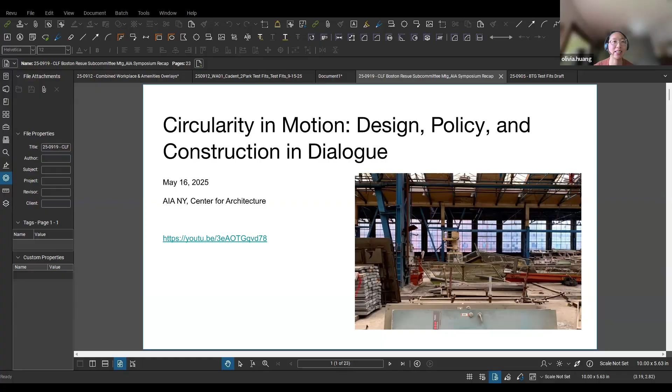And she also, I think, yeah. I think we're just seeing your cover slide still, Wei. Maybe we're not seeing the slides that you're panning through. Oops. Sorry, one second. Computer froze. Okay, here we go. Let me just share my full screen. Okay, one second. Okay, how about now? Yeah. Yay. Okay, great.

So this slide has a couple key components, like, how do we see a building not as an object, but as a process? And one of the things we were all very curious about is what Denmark is doing right that we're not able to follow as rigorously. It's not just the cultural and policy context, but it's really through their legislation.

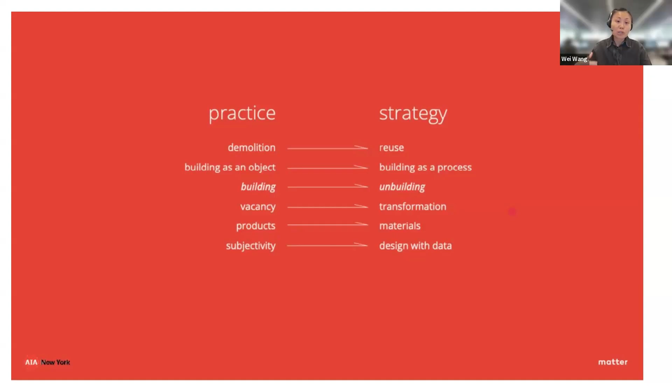It's really about circularity not being viewed as niche or experimental, but how you have a policy-supported pathway that can integrate industry, research and governance. So there's a very strong relationship between policy and the private sector, and the whole political landscape is more homogeneous, and they also build infrastructure along the way to go with the policy.

So another key component, then I'll hand it to Greg: in order to understand how to design within circularity, you really need to understand the context and constraints of the existing structure, but also what inventory you have in the existing building, documenting the resources you have on hand, their value, quote unquote, how you define value, and to really help building owners take the first step of shifting their thinking. So, Greg, do you want to take it from here?

Yeah, could we actually go back to the previous page for one second? Sure.

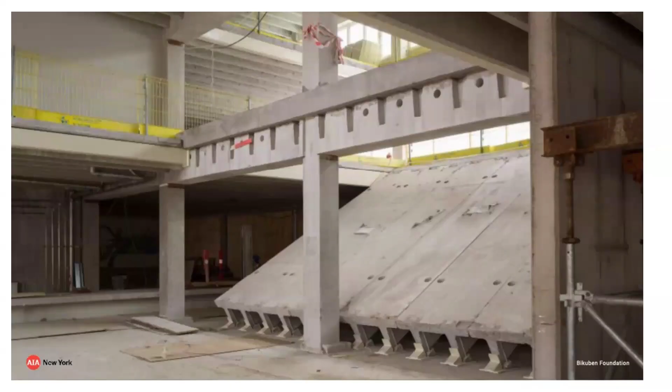So part of Lena's work focuses on, like Wei was saying, uncovering the value of what owners currently have. This is from a project she did in Malmo, Sweden. The project is called Varvstaden, and it's a kind of closed loop system. The owner has a series of buildings on a formerly industrial property that are being redeveloped.

This is a slide of the documentation that Lena put together, showing how the building serves as a toolbox, viewing the different components as items to reuse, reclaim, or recycle, and that we need to present this information back to the client or owner as our understanding of what the value is and how the different components can be repurposed.

This is a unique example because it is a large property with multiple buildings, so the client is redeveloping them in stages, and they're able to actually have materials taken out of one building and stored in another building until they're ready for future use.

The process she pursued with this campus really showed the importance of material audits and how to place value on materials. Also coming out of this conversation, and the conversation throughout the day of the symposium, was the idea of reframing the word waste and instead speaking about things as materials. That reinforces the concept Lena executed with this Varvstaden project.

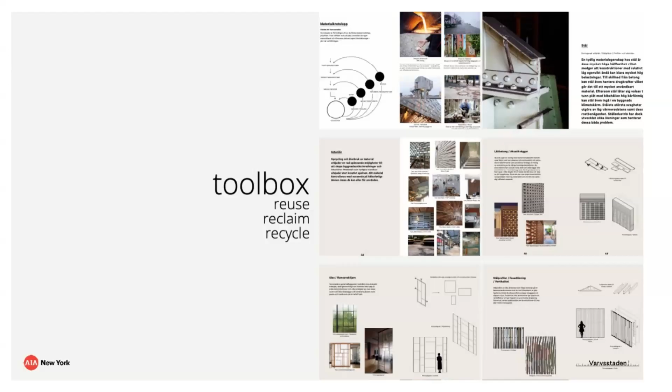And also, if we go to the next slide, another example she showed from another architect in Copenhagen, where they renovated a very banal office building into, I think it was kind of a multi-use building, but this image really compelled me, where you can see that they basically took the slab and cut it and folded it down. So bringing an architectural language to reuse here, and this became a bleacher for a kind of performance gathering

space within this building, creating double height spaces and using the materials that were already there, and also reducing the carbon input to reuse them by literally cutting it on site and just dropping it down. So this is a bit complicated in terms of the engineering that went into making this particular change actually work, because there's a lot of engineering that went into checking that these slabs could sit this way and the building could be supported. But it just goes to show that with a little creative thinking, we can kind of reconceptualize what reuse means.

So the latter part of her talk talked about Circu, which is a program that was in development when we first met Lena, and she's since developed a lot in terms of the actual infrastructure to operate it. And what it is is a database that pulls from open source information that's available in Denmark. So it's a bit different than our infrastructure here, but they have a lot of open source information on their building stock. And so it may not be 100% accurate, but this gives an owner a very good picture of what value might exist in their building.

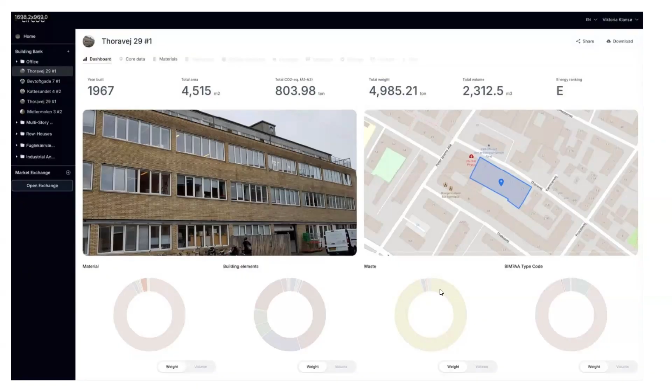Session 2 was really about advancing reuse beyond recycling, and we had 2 speakers, Deconstruction Dave, as he's affectionately known. He's the founder of New York City Circularity Construction Network, but before that, he's also the owner of a reuse general contracting practice in Seattle. And he's done over 5,000 reuse projects, mostly focused on residential work, but he really deconstructs the entire home and takes apart stud by stud everything, and then finds either a new use for them with a different client, or with the same client tries to reuse that material in a new project.

And Stephanie Phillips is the senior program manager at the deconstruction department of the city of San Antonio, which is actually an arm of their historic preservation department. And so we brought these 2 together because they have done a lot of work together and have actually done a lot of talks together, but they both have this knowledge about what it takes to actually implement a project, both from a constructability standpoint and from a financing, policy, and community support standpoint.

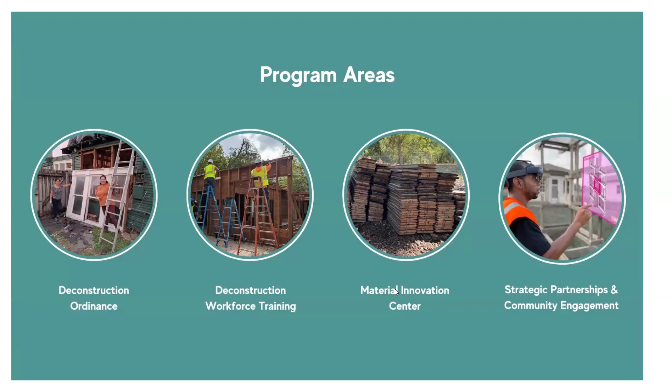And it ties into the work that Dave is doing because he has been working to create multiple reuse innovation centers, which are also kind of not just storage facilities, but kind of a laboratory. And on the next slide, he talked a bit about the reuse innovation center he's starting in New York City, which is kind of going hand in hand with the New York City Economic Development Corporation's design and deconstruction guidelines, which we'll touch on in a later session.

But this is really kind of what the prototype for the New York City facility is looking like, with a series of workshops and kind of dedicated space for storage, but also space to really sell and distribute the products, not just put them in a place where they can sit forever.

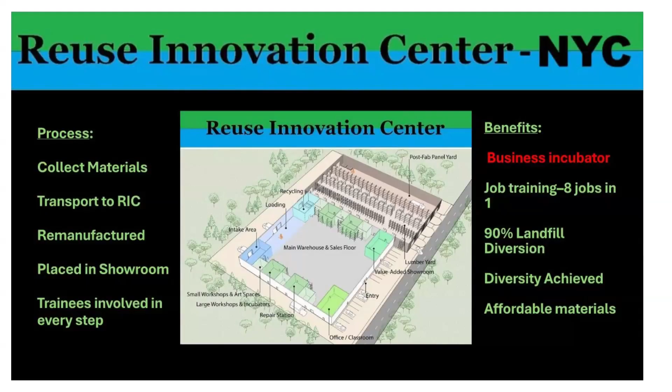Oh, Wei, you're muted.

Sorry. So the way that we sequence these sessions is that we kind of zoom out international, aspirational, and then we kind of go into other examples from other states and cities. And then we want to kind of bring it back to New York State. So a large piece of circularity is the policy aspects. So we were fortunate enough that we had members' connections with folks in the city and state.

So Selvi Binder, she's the senior policy advisor in the mayor's office, and Felix Heisel, I'm sure a lot of you know, he's the director of the circular construction lab at Cornell. And we also had Brian Kavanagh, who's the state senator in New York City, and Anna Kelles is the assembly member from upstate New York.

So this session really is to get some insight on the critical role of policy and how it can shape the future of circular construction, from state legislation to local implementation, and how that will all pan out. So there are no slides, just snapshots. So it was just a discussion, but a big thing that they opened with was New York State is projected to run out of landfill space within the next 15 to 20 years. So infrastructure wise, this is something very real and tangible that we need to tackle.

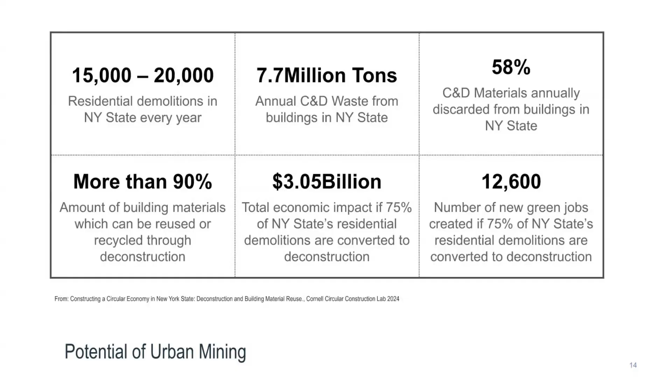The other thing about the materials, and it relates to this too, is that there's a time-based relationship with our materials. So when we talk about deconstruction as well, that starts to really tie all this together. One of the big issues for infrastructure in New York City is space. And so that means both storage space for materials that are being reused, but also storage space on the actual job site when we are trying to take materials out and deliver them somewhere else.

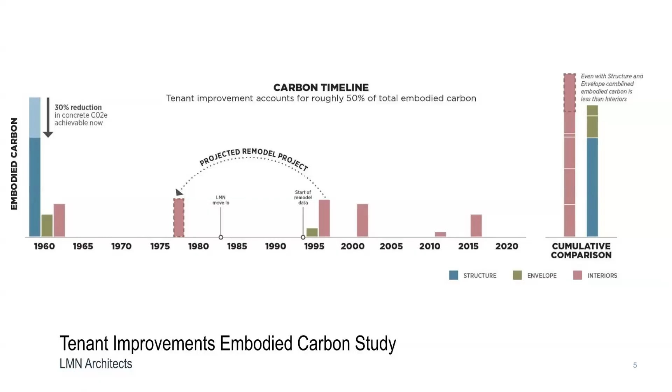Yeah, and just to go back to this, Greg and I also listen in on Sydney's glass reuse group. There are monthly calls, and she will talk to contractors and architects about actual project precedents, and things like, this building doesn't have a loading dock, or it's a certain size, and these little bins can't fit. It's all about logistics, and then how do we bake that into the design from day one, so that in the future, if you need to reuse, there are fewer logistic issues.

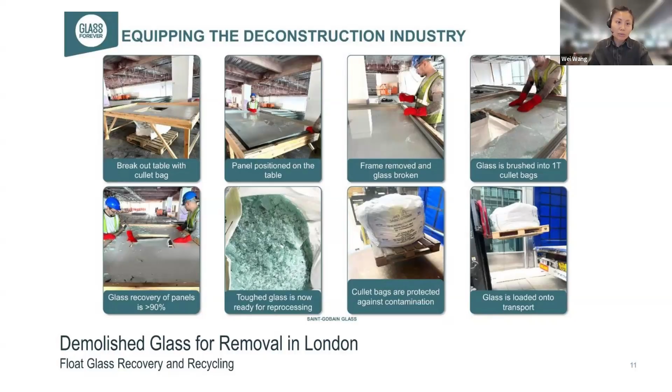And she also mentioned some of the contractors talking about the certificate of insurance: if it's reuse, it has a different implication for demolition. So all these things are seemingly not design, but they are part of design, because you have to fold the operations of the building in when you're designing it, so you allow these opportunities in the future when the building inevitably needs to be renovated or adapted.

So then in the last session, we went into a New York City project, specifically a New York City Economic Development Corporation pilot project for the circular design construction guidelines. The speakers are the team members and the VP from NYC EDC. Sarah Sachs is a partner at Barrow Happel. They lead the circularity portion, and Shafali Sanghi is director of sustainability from Dattner. She oversees the sustainability component and works closely on the circularity and reuse portion.

So in this session, we wanted to use an actual example of how you implement the design guidelines on a fairly complex, large, very ambitious project, and it's in the very early phase of the design. It's still in SD, or not even, they just wrapped up concept design.

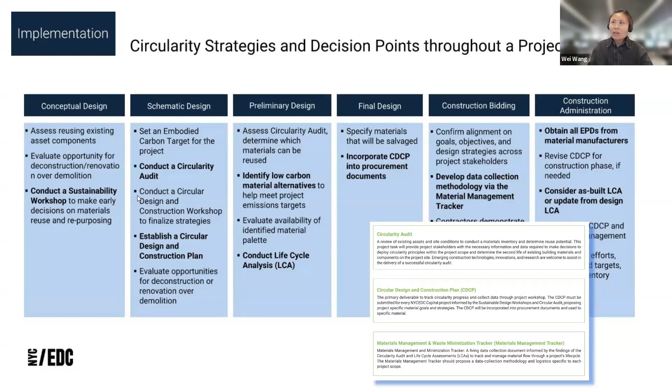And then another thing is the circular design construction plan. So this is a live document that keeps being updated at each phase. So you really track progress, and you continuously update the circularity process, and then the data collection, and then how they're being used in each phase. And then there's also the material management and waste minimization tracker. All of that is a lot of data tracking, and so you can compare with the benchmark. So these obviously are super new territory, and truthfully, no one has done it at that scale.

So this is just a view of the building itself, located in Midtown East. It's an existing building, sorry, it's a life science, it's already an educational building, and so the idea is, there are different phases, but to deconstruct and to build a new building with CUNY and Hunter. So the idea is the pathway. So there's a college and then higher ed within the same campus, and then it also involves site improvement, convert the existing non-ADA accessible bridge to accessible, and then just improve the overall circulation and landscaping around the site.

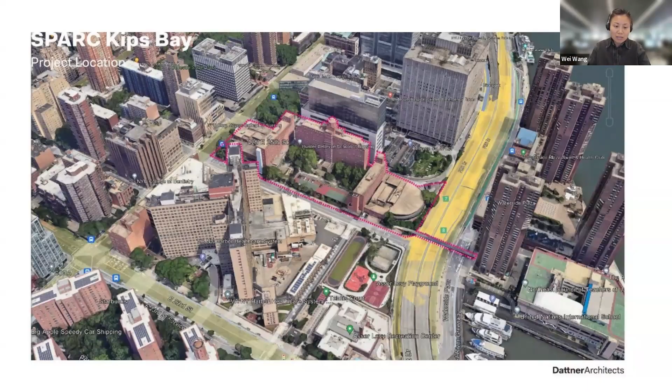So this is a snapshot from the presentation. The team went in the beginning of the project and did a Matterport scan of all representative spaces within the building, and then used that information between the scan and photographs to categorize different material streams, and what are some of the low-hanging fruit or long-term goals. And so I thought this was a very compelling image, just using doors as an example.

Doors are complicated. You have different sizes, different functions, different ratings. Some have louvers in them, some have asbestos, and you have high goals and you want to reuse as much as possible, and then it's almost like this elimination game, like, oh, the size, and then asbestos and louvers, and suddenly you don't have a lot left after these parameters.

And there are not a lot of companies, aside from Doors and Hinge company, to really take these reused doors and refurbish them into new doors or reused doors that have a warranty. So many complications, and doors is just one of the examples. So step one is really to take that audit.

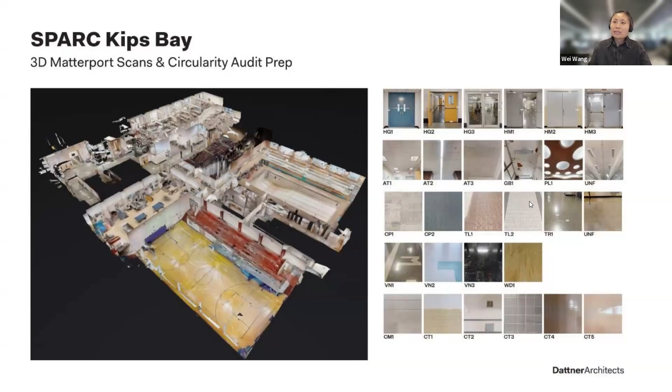And then another thing is to figure out, the team looked at different ways of, first, highest value, obviously you reuse without much modification, but if the materials can't be used for the existing project, then is there a marketplace that you can retrieve value, you can sell it, or obviously the last resort is waste, landfill. So there's many different paths for different materials.

Oh, sorry. And then another thing is to track what are some of the current marketplaces. So the team created an outreach list, and they reached out to various manufacturers and reuse centers to understand what the appetite is currently, and what the future roadmap is like. So I think with Dave Bennett's reuse center, some of it is maybe a new product that hasn't really been invented yet, and there is a huge economic opportunity that can come with that, so part of that too is driving future economic opportunities.

And then, yeah, the project is in such an early phase. Everyone has such high hopes, and people have so many questions for the team. And Shafali was like, look, you just gotta wait because it's so new, right? All these things take time and trial and error, and testing out a new guideline that has never been done before in a project this scale is incredibly difficult. And not to mention there are different stakeholders within the building.

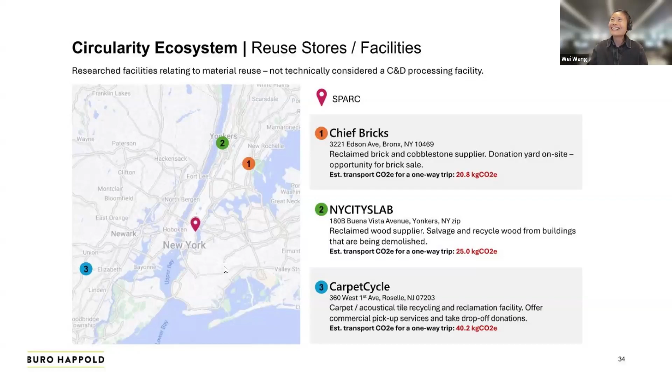So New York City clearly is really trying to take some steps to go forward. The NYC DDC is not only putting out language, but really looking to incentivize a lot of this. What have you seen, both through the symposium and in the general area, would be the most effective way to really start pushing commercial deconstruction, reuse, and completing the circle? For context, a lot of practitioners in our area, New England and Boston-centric, really like the idea of it.

They like the idea of eventually getting into circularity and, oh, who else is doing this? But there's no real first, second steps being taken. And there could be some policy items or practical implementation. But really, in your area, what have you seen be the most effective way for AEC practitioners to actually start implementing truly circular practices?

So honestly, Greg and I were like, what's the key ingredient to truly kick the thing off? And to be honest, there is none. It's like all things need to happen, maybe not at the same pace, but the circular design construction guideline is a good jolt in the system. And then there's momentum, there's also marketing. But I will have to say circularity, perhaps at a smaller scale, has been happening across the country. It's just not at the scale that we want.